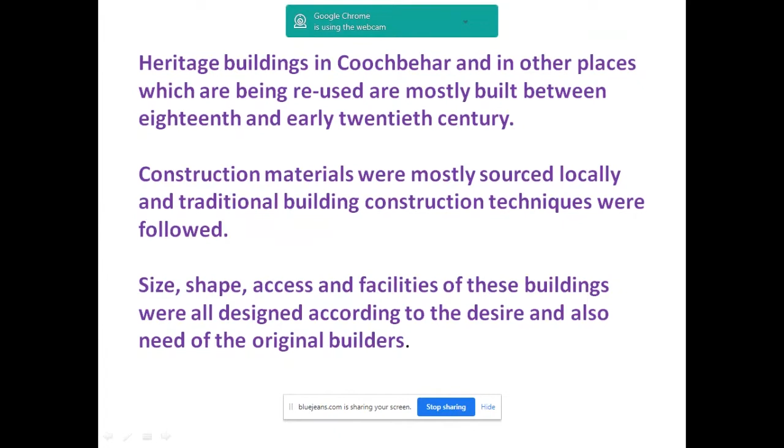We have to conserve and preserve them on a permanent basis. Heritage buildings in Coochbehar and other places which are being reused are mostly built between the 18th and early 20th century. The construction materials are mostly sourced locally using traditional building construction techniques. The problem is that most of these building materials and techniques are now obsolete with the advent of new building materials and new construction and maintenance techniques. So repairing and maintaining these buildings is a big challenge before its present users, and the usage pattern of these heritage buildings has considerably changed over time.

You see on the screen a building in Shantiniketan. This is the first building, Shantiniketan. Before this it was not called Shantiniketan, it was Bhubandanga, and the entire area is named after this building. This was built to accommodate the family of Maharshi Devendranath Tagore. Now it is an exhibition place, exhibiting paintings and other art objects to touring visitors.

Another building, Chitrabhanu Studio in Shantiniketan. This was once a hub of creative activity of the poet's son Rathindranath and his wife in Shantiniketan, both during and even after Rabindranath's lifetime. Now it is an exhibit. So the usage pattern has changed a lot.

The Currency Building in Kolkata, in Dalhousie, once accommodated a mercantile bank. Now it partially accommodates some exhibition halls and partially government offices. Victoria Memorial Hall, Kolkata, a memorial hall, is now a museum. Jorasanko Thakur Bari, which was a dwelling house, the ancestral house of Rabindranath Tagore, is now a museum.

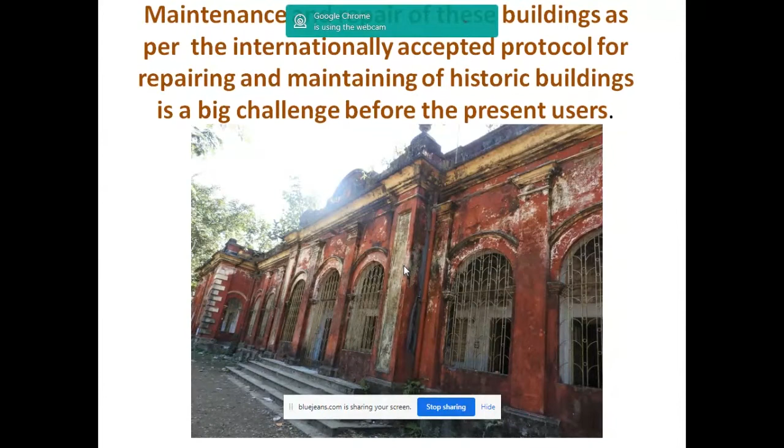As per the internationally accepted principles of conservation, the originality, authenticity, and integrity of historic old buildings should be retained as far as possible, with minimum changes and alterations. However, the radical change in usage pattern of these buildings has called for some additions and alterations during their maintenance.

There are many examples. Number one, many of these buildings are now air conditioned, or parts thereof, as in Victoria Memorial, the Currency Building, and so many other old heritage buildings, for the comfort and other purposes of their present users.

Air conditioners have been installed over there. And for running an air conditioner, there is need for electrification, the installation of electrical cabling, electrical wiring, and all that. It's not very difficult to imagine what amount of structural intervention has taken place in this building.

And while doing so, unfortunately, we never cared or remembered that these buildings were provided with large open windows for the intention of giving comfort to its users, and at the same time for enough evaporation of moisture from inside the building to keep it dry and healthy. For the sake of air conditioning, we have closed those large windows and invited serious dampness in most of these buildings.

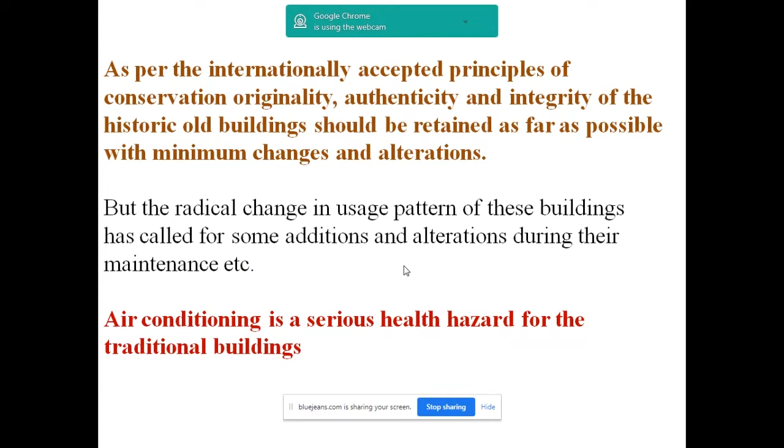And wherever we go, wherever we see a heritage building, damp, damp, and damp. Dampness is the most common conservation problem observed in almost every heritage building around us.

Let us ask one question to ourselves. Why is it suffering from dampness today? There was no such problem before. Had there been an inherent problem, the building would not have survived and performed so beautifully for more than a century. Then where did this problem crop up today, and why?

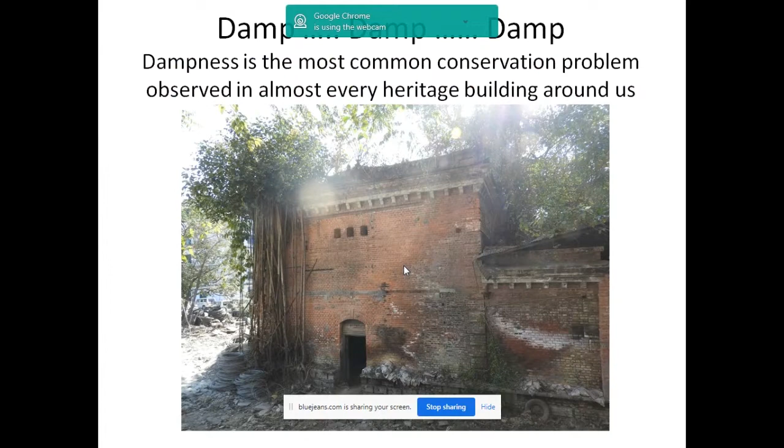Roof drainage system is important. Whenever we talk about this dampness, we either look at the roof for a leaky roof, or we look for rising damp. Leaky roof surfaces are less important than faulty rainwater spouts, and faulty spouts are less important than faulty rainwater pipe joints. Also, the surface drainage system is important.

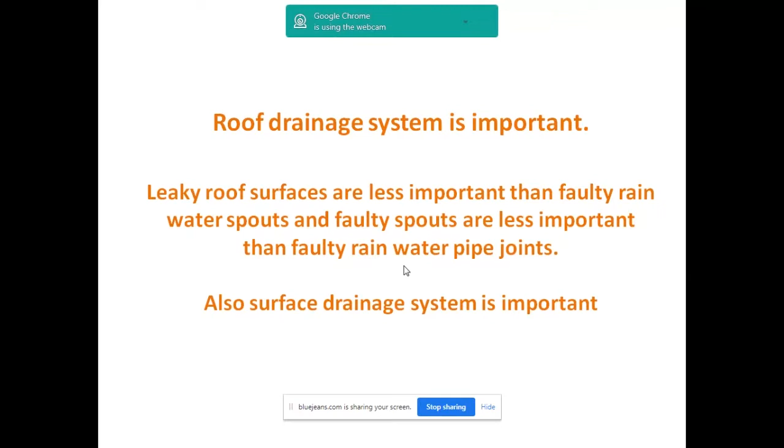In this building, lots of structural interventions are there. I have visited this building last January.

Rising dampness is a cause of moisture penetration, which is very commonly overdone. Rising damp is usually a secondary problem associated with defective surface drainage. Ground and surface drainage are almost always defective around the building. We do not find any surface drainage system available in this building, and it is suffering from severe damage.

Another building, the same thing. Definitely when the building was designed by its original builder, there was a surface drainage system, which gave it good health and a good lease of life for more than a century. But the drain has gone, vanished, and that has contributed to the dampness and other structural problems with this building.

Experience shows most of the visible damages and distress in an old masonry building are the results of inappropriate repair and maintenance to it over the years, either by its present users or by the present owner.

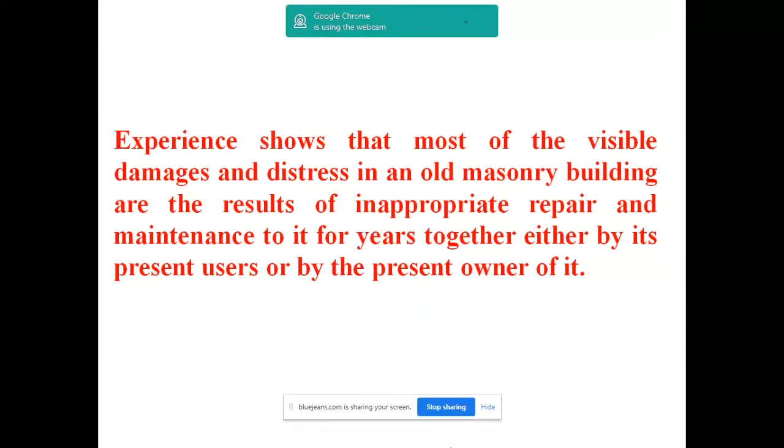An old building, more than a century old, to solve the problem of its leaky roof, has been tar-felted without paying any attention to how it interacts with the very weak old lime concrete roof surface. This tar-felting concept works well with modern cement concrete roof surfaces, but it has been laid on a lime concrete surface, and it has caused trapping of moisture, and the trapped moisture is taking its toll on the building - the cracks, the rusting of iron members of the roof.

But it should have been done like this. The original roof was a lime concrete roof. It's not that we cannot do it nowadays, or that the problem is that those materials are not available, or those specialized skills are not available. It's not that - if we pay a little attention, we'll find these things are still available. And it should have been done like this.

A fort - I don't exactly remember the name of this tourist place. A good number of tourists, thousands, visit it every day, and it is under maintenance. Somebody is maintaining it, trying to maintain it, and you see the serious dampness problem. That dampness problem must have come from inappropriate repair.

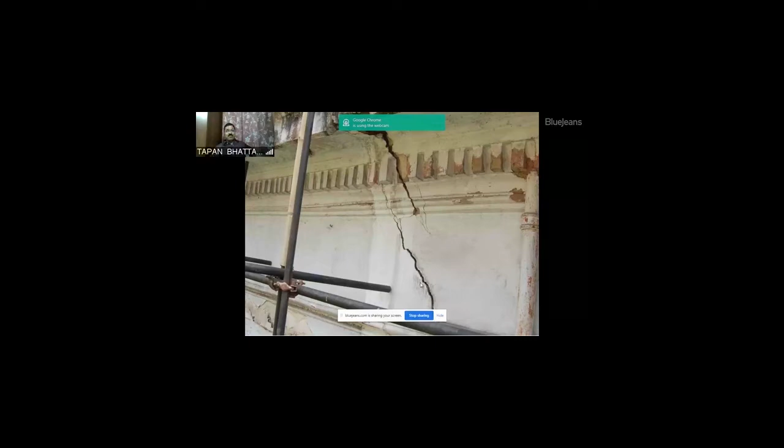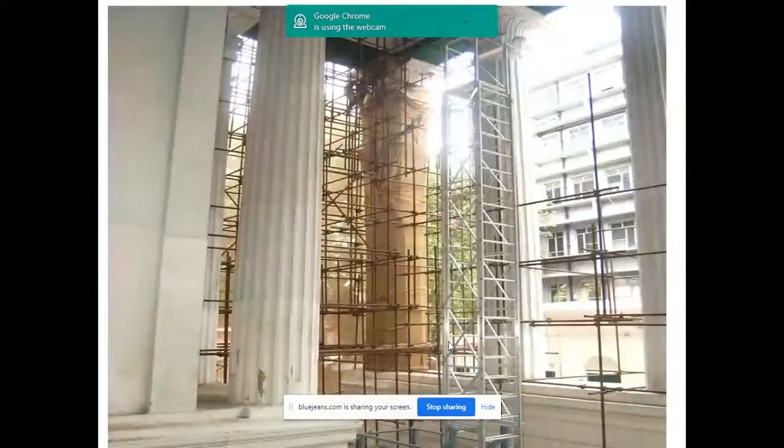Metcalfe Hall, Strand Road in Kolkata. This building is a documented monument under the Archaeological Survey of India. First, notice there is a crack, a wide crack running along it - see the extent of the crack here. Seeing this crack, we invited engineers from so many corners of the country, and they started looking for its causes. There may be settlement, there may be a foundation problem, there may be anything. Finally, we did not find any foundation problem, nor did we arrive at any settlement issue.

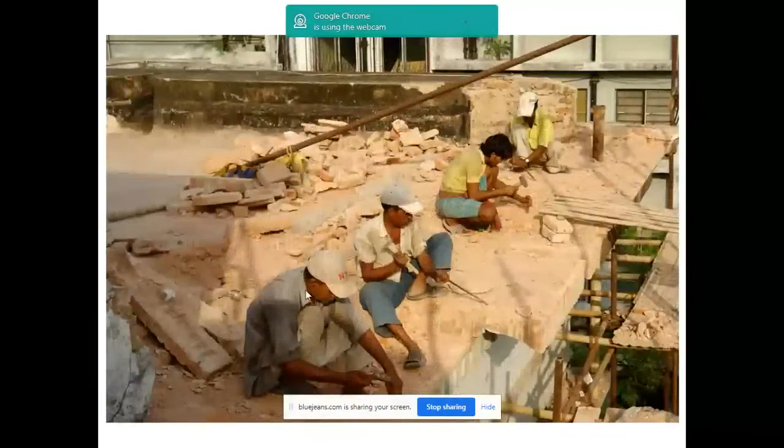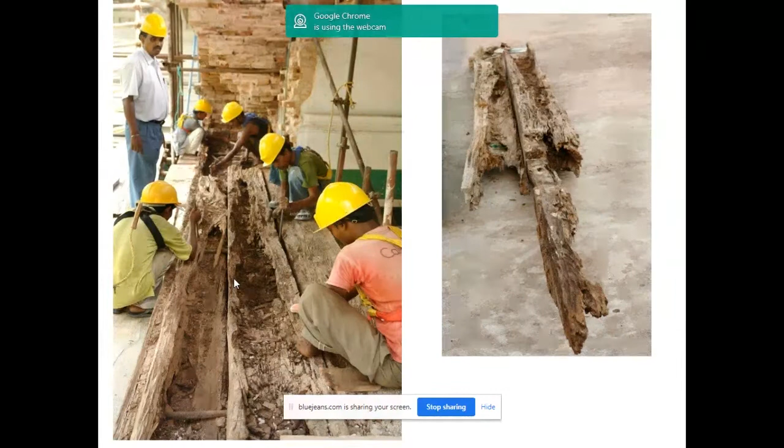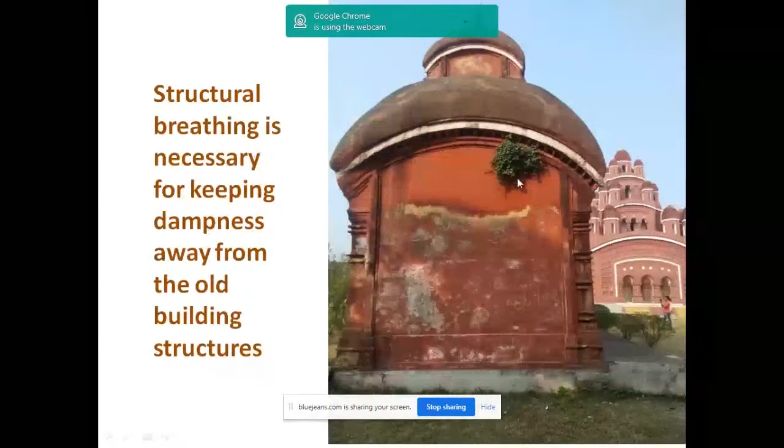By using modern materials, we have rather compounded the structural problem. We wanted to beautify the building with good intentions. The owner of this temple structure wanted to repair it and make it presentable to its present users. And what has happened? The old porous materials are covered with modern cementitious materials, and it has resulted in serious dampness problems. The retention of moisture has also caused growth of plants.

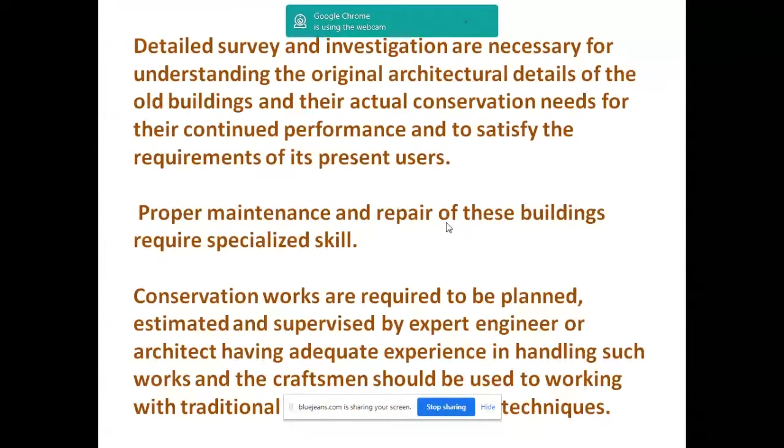Conservation works are required to be planned, estimated, and supervised by expert engineers or architects having adequate experience in handling such works, and the craftsmen should be used to working with traditional building materials. Necessary repairs should be done using compatible materials only, which match the composition and strength of the existing original fabric as far as possible.

When we do air conditioning to a building, what do we do? Definitely we have to cause some damage to its masonry walls, roof, and so many places. While repairing all those damages, we use cement. But my building is not built in cement. When the building was built, cement did not even exist. Cement has come into the picture only after the mid-19th century.

Before that, all buildings were built in lime mortar, which is soft and porous. If I repair those buildings using rigid and non-porous cementitious material, the natural breathing required to keep dampness away from the building, that property is gone. And I am inviting dampness problems and other structural problems due to this inappropriate repair, not intentionally at all, but due to lack of knowledge.

Finally, for the sake of conservation of historic buildings, the extent of structural interventions aimed at satisfying the needs of its present users should be kept to a minimum. I should expect air-conditioned weather and so many facilities attached, washroom and all that in a modern building. But I cannot expect all these things in Prithviraj Palace. If I expect all these things in a heritage building, an old building, then I have to make lots of structural changes to it, which the building may not be happy to receive at all.

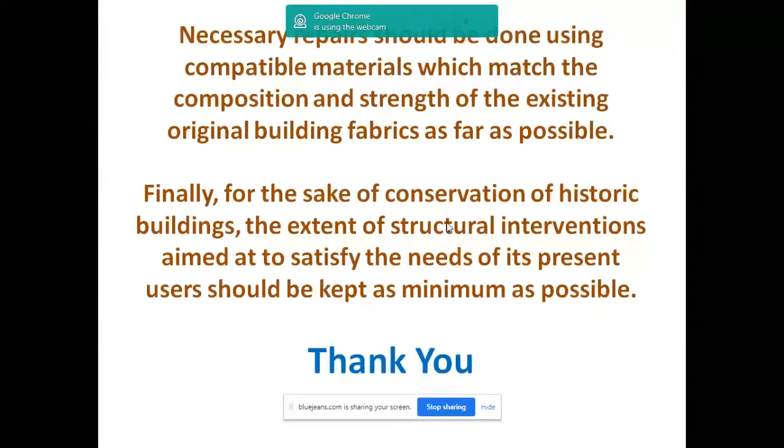Thank you very much.